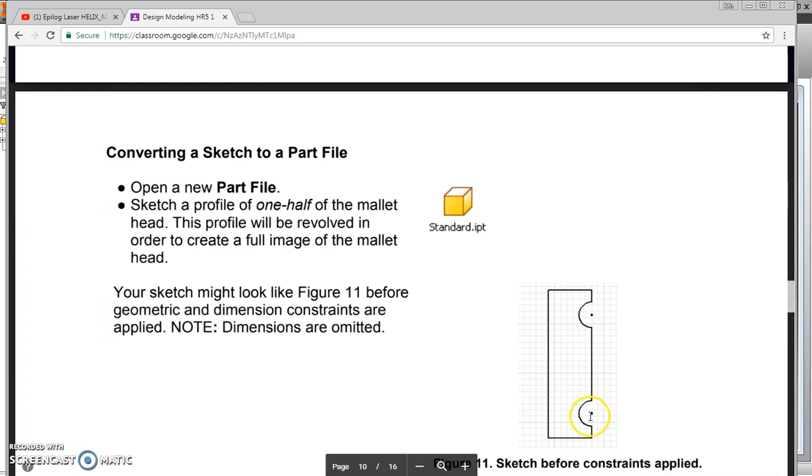Okay, we're going to take a look at how to create a mallet head using the revolve command with Autodesk Inventor. So to start out, we are going to be making a shape that looks like this. It's going to be a rectangle with two circles that we will trim, and the dimensions that we're going to use are right down here. So it's going to be 3 inches tall, and this rectangle will be 0.875 inches wide.

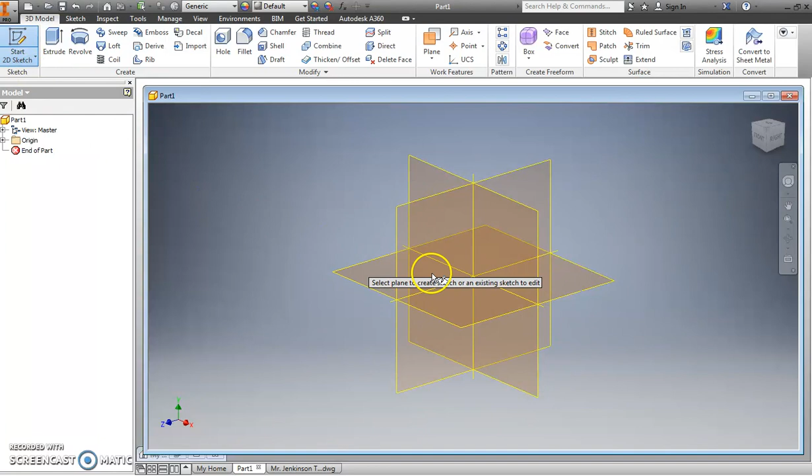So we're going to go ahead with Autodesk Inventor, start a 2D sketch, click on the XY plane, and we're going to use the rectangle. Again, that is going to be 0.875, 3 inches tall. And next, we'll use the circle command. And it doesn't matter at this point which side we draw the circle on. We just need to make the circle 0.1 in diameter and make sure that it's attached to the line. And again, down here toward the bottom.

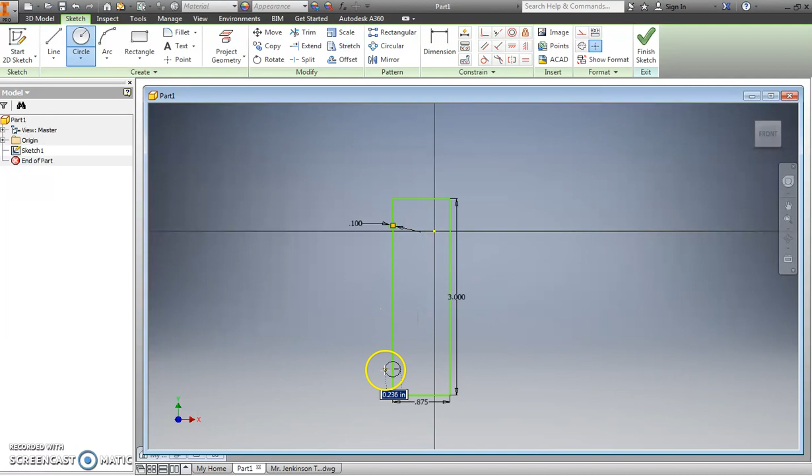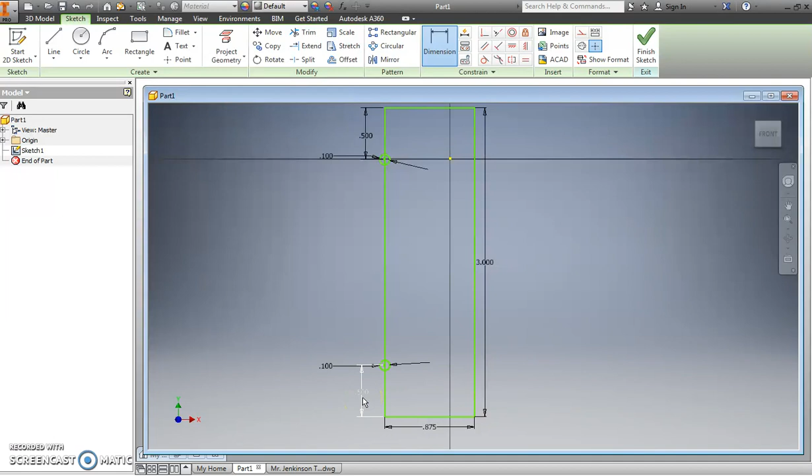And now we're going to dimension from the top line to the center of the circle, and we want that dimension to be a 1/2 inch, 0.5. And again, from the bottom line to the center of this circle, 0.5. Now we're going to trim the parts that we don't want. And then we're going to finish this sketch.

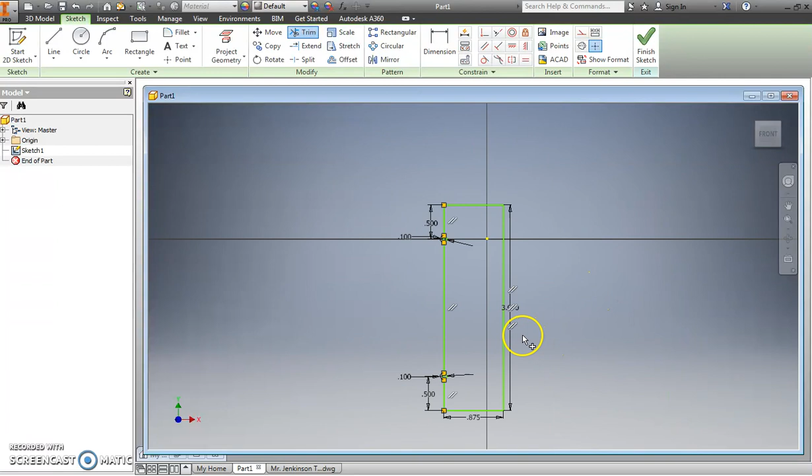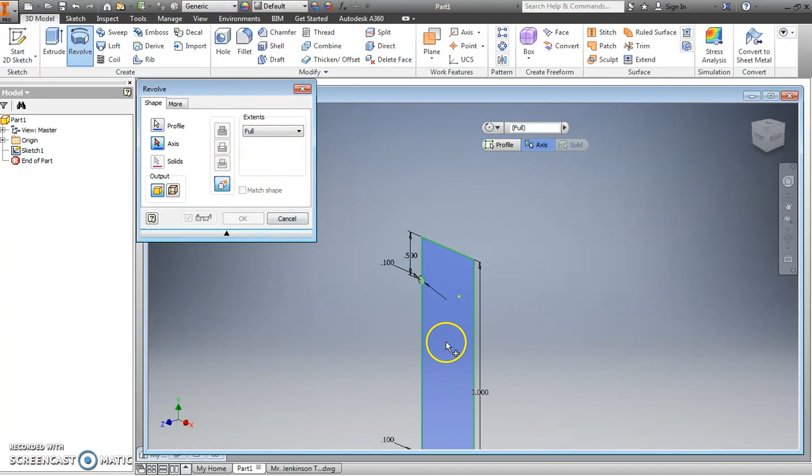Now we've used the extrude command, and we're going to use the revolve command at this point. And so upper left hand corner, click on revolve, and I'm going to use the drop down here because you can see it's selected the surface that we want to revolve, but now we need to select the axis. And we don't want to revolve it around this axis because our circular features are on the other side. We want to select the opposite axis, and when I do that, then I get the revolution and I get the shape of the mallet head. Click OK.

We're next going to create a chamfer on the top and bottom edges. I'm going to select both of those. And for the distance for the chamfer here, that's to be 1/16. Click apply, and you can see now we have the chamfer on the top and the bottom. Close that.

I'll let you assign colors, materials, and things. Make sure you use a bright color. It's going to be a children's toy, so we want to use some bright colors, make it look nice. But I'll leave that up to you. I'm not going to cover that in this video.

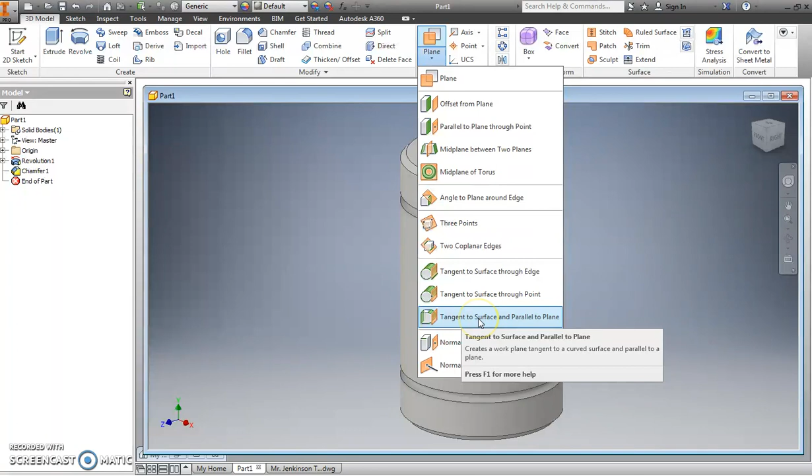The next thing we need to do is add the hole for the handle to be inserted in. That's a threaded hole, so what we're going to first need to do is create a point on the surface of this cylinder. So we're going to create a work plane and select the drop down. We want this to be tangent to the surface and parallel to a plane. Click that. We're going to first select the surface that we want it to be tangent to. Then over in the left hand side, I'm going to click the plus sign by the origin folder, and I'm going to select the XY plane. Click that. And so now I've got a work plane attached tangent to this cylinder. Tangent meaning touching a circle in one place.

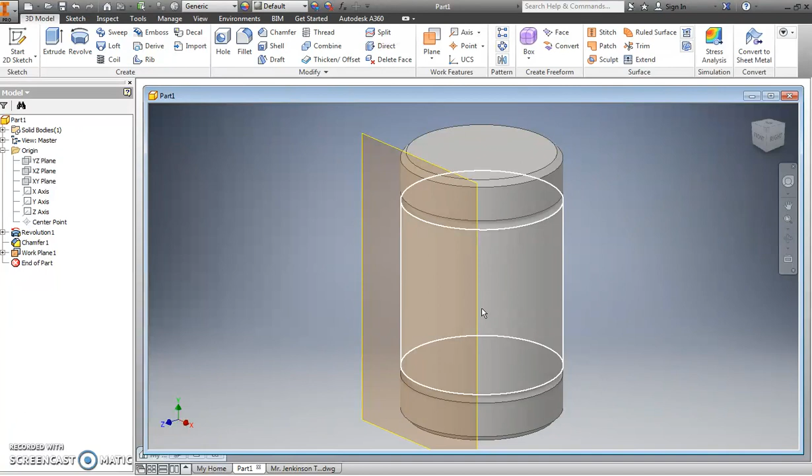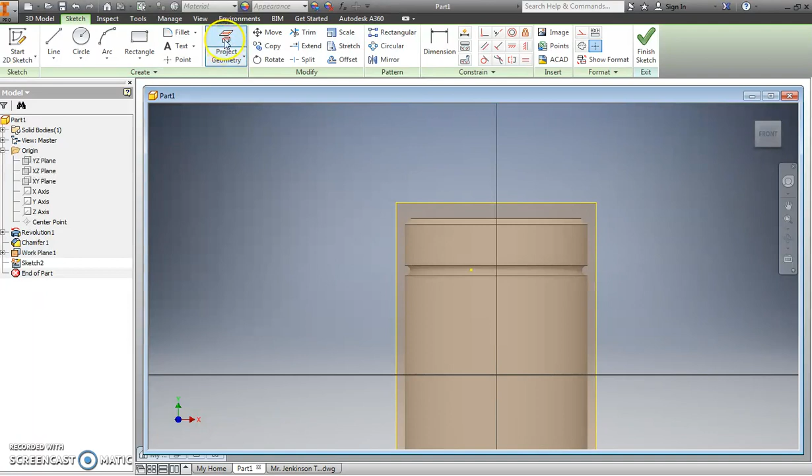And so now that I have that created, I'm going to start a 2D sketch and then click one of the corners of the work plane so I can start the 2D sketch on this work plane. At this point, I need to project some geometry so I can center the point where I want it. So I'm going to just click project geometry. I want the top edge, and I want one of the side edges of this mallet head. So now that I have those selected, you can see they're yellow. And I'm going to place a point out here. And I want that centered.

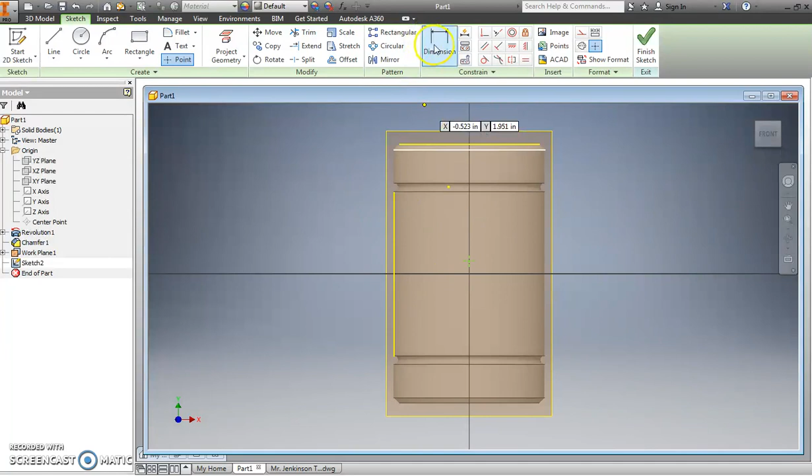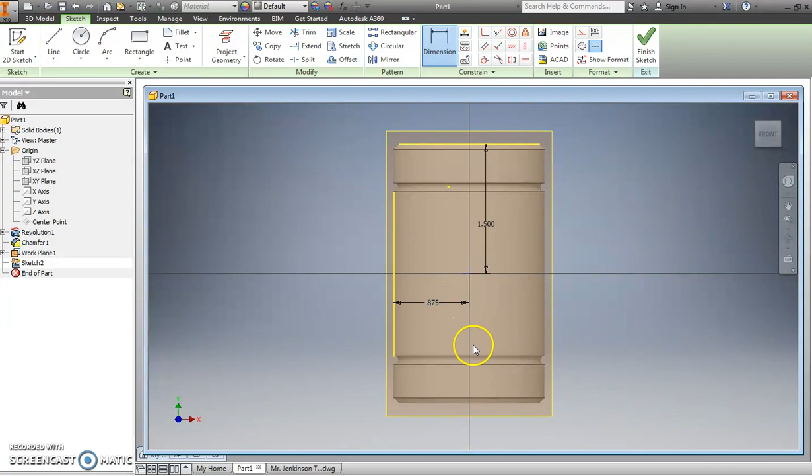So I'm going to dimension from the top line that I just projected geometry from to the center of the point. Remember, our mallet head is 3 inches tall, so half of that is 1.5 inches. I'm going to dimension that. I'm going to dimension from the side to the point, and that should be 0.875 inches. So we're good. The point is centered on our mallet head. And now when I finish this sketch, I have a point here, and when I select hole, the hole will attach to that point. Alright, I want a threaded hole, so I'm going to select threads.

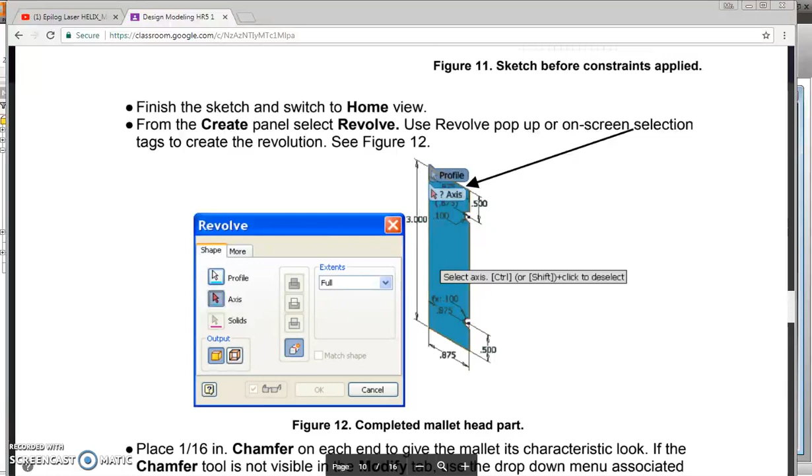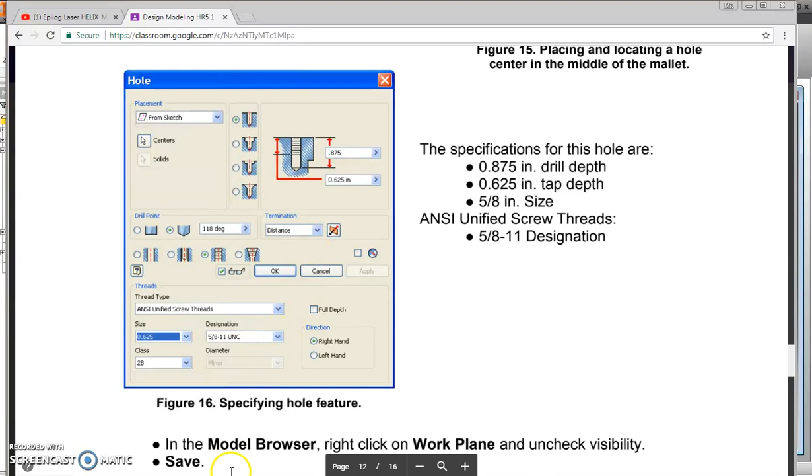And you're going to need to look at your PDF file to make sure that you get the correct threads. And notice the size is 0.625, 5/8 inch coarse threads. The threads are going to go down 5/8 of an inch or 0.625, and the hole is actually drilled at 0.875. So we're going to make those settings with Inventor here, and I first need to change the size to 0.625. Notice that updates here.

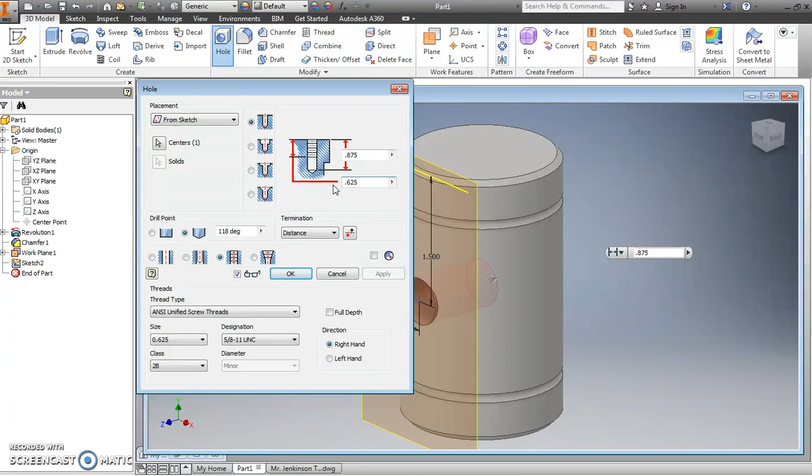And now I need to change some features here with the hole. Notice it's not going through all. I'm going to click distance on that for termination. And now I'm going to set the first distance. The depth of the hole is 0.875. And the threads are 0.625. And now I click OK. And I have the threaded hole.

You notice we don't need the work plane anymore, so we're going to go over in the browser on the left hand side here. I'm going to right click on the work plane, and then I'm going to take the check mark out to get rid of the visibility of the work plane. And now you've got your mallet head put together. The next step for this would be to do a save as, and make sure you save that in your documents folder where you can access that at a later point. And another point would be to make sure that you do assign materials and colors to make this a bright colored object.